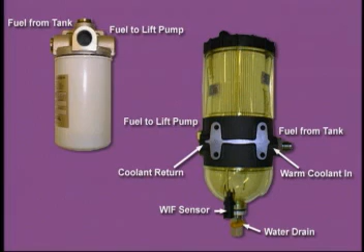The fuel flows out of the fuel tank and through a pre-filter. Two versions are available. The first unit is a replaceable spin-on element with a 140 micron rating. The second unit is rated at 25 micron and it contains a water in fuel sensor, water drain, and coolant passages that can be plumbed into the heater hoses to prevent fuel gelling in cold weather.

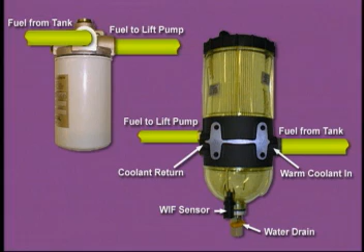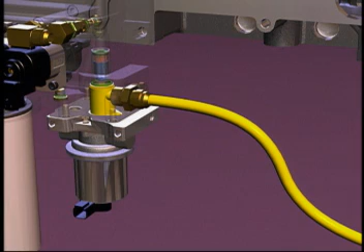Fuel flows from the pre-filter to the lift pump. This pump runs for the first 2 minutes after the key is turned on to ensure that fuel gets up to the gear pump quickly for easier starting.

At 1 psi of pressure, a valve in the IFSM housing opens to allow some lift pump output to flow to the drain line. This bypassing of fuel helps to bleed any air from the supply passages. When the engine starts, the gear pump can draw fuel directly from the inlet fitting through the anti-drainback valve.

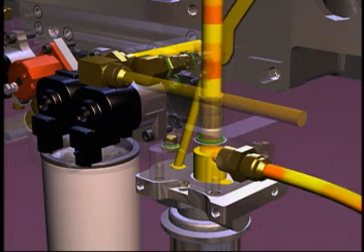After 2 minutes of operation, the lift pump shuts down. The gear pump then draws all of the fuel directly from the inlet fitting past the anti-drainback valve. The gear pump provides the high volume and constant pressure needed for the system to meter properly.

The 380 psi high-pressure regulator installed in the IFSM between the gear pump and the filter is a safety valve to prevent damage in case of a stuck fuel shutoff valve or other blockage in the fuel lines after the gear pump. Any fuel flowing through the high-pressure regulator is dumped back to the drain line in the IFSM and then returned to the fuel tank.

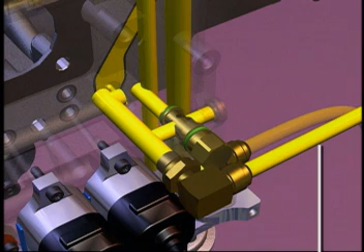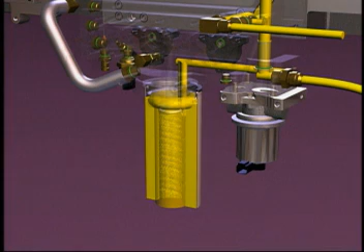Fuel under pressure flows to the fuel filter. This filter is a 98% efficient 15-micron filter. After contaminants are removed, the filtered fuel flows to the shutoff valve.

When the key switch is in the crank or run position, the ECM sends a signal to open the fuel shutoff valve. Fuel flows past the open shutoff valve into the rail that supplies the actuators. The 250 psi fuel system regulator allows excess fuel to flow out of the rail to limit and maintain the pressure.

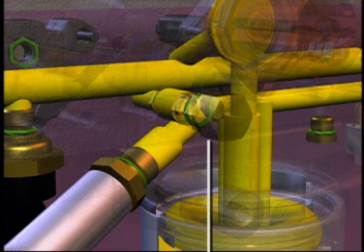This excess fuel flows through external tubing to a passage in the ECM cooling plate before going through return tubing to the inlet side of the fuel pump. With a constant pressure at the actuators, the ECM sends signals to the actuators to control the fuel flow to the injectors.